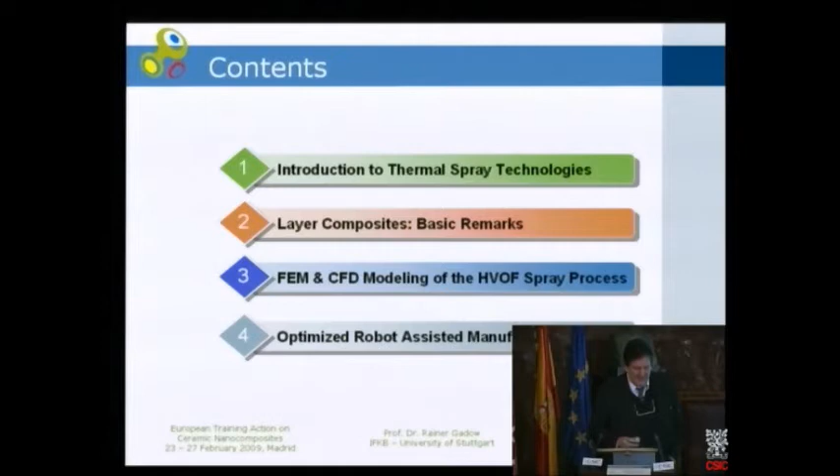So, a few words on thermal spraying. What does it mean? We have a high energetic process where, with a variety of torch equipment, we have a high-speed expanding flame or plasma jet, and we try to load this expanding jet stream with powders, solutions, suspensions, emulsions, whatever may be useful to produce performing coatings on a substrate.

We like the Swiss, so this yellow robot is not from China, it's made in central Switzerland. This is a new generation of robots with very high stiffness and precision in their movement, so they can handle a torch with the same power as a jet engine of a military aircraft, but reduced to a tenth or a thousandth of its volume.

What really occurs in this process is very fast melting of the original particles by intensive heat transfer from an electric arc, a plasma discharge, or an intensive autogenous flame. It can also be a laser employed, or detonation of a gas mixture. The most important feature is how to manage the acceleration, in processes that mostly work in the range of the speed of sound and even superior. I'll show you some details in a minute.

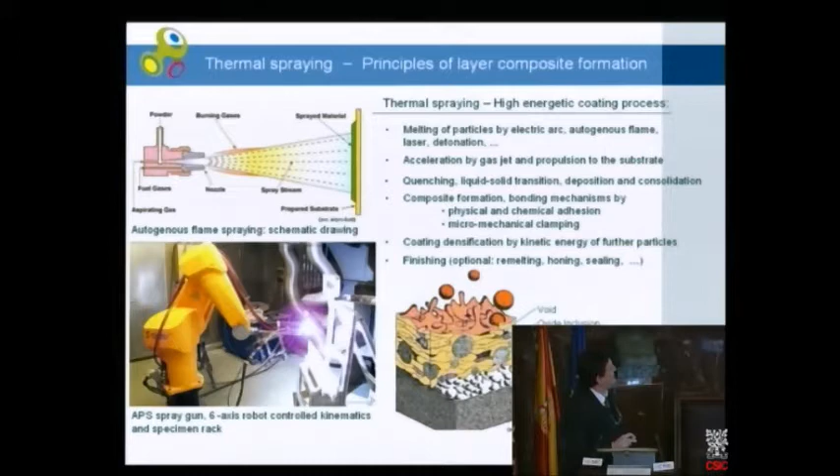An extreme example is shown here. We have a material as a coating with a melting point far beyond 2000 degrees C, and we coat a fruit, an apple, that can hardly stand 60 or 70 degrees C without being converted to a nice dessert, as some cuisine chefs like to do. The reason is that neither the torch nor the apple itself is ever standing still.

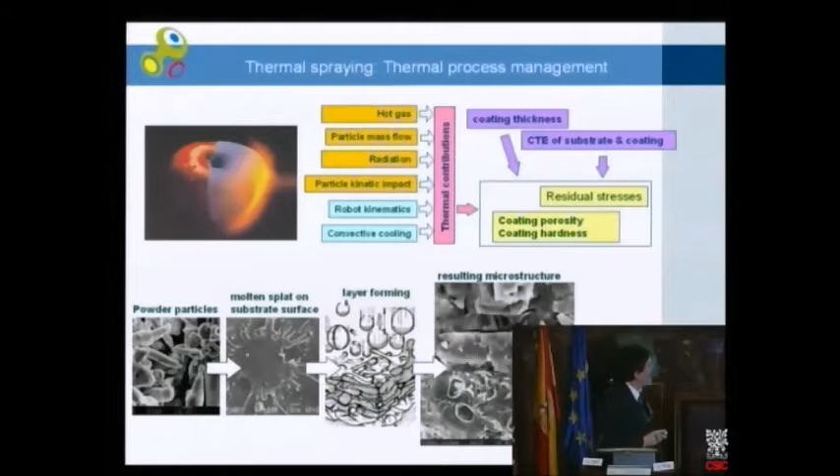That means the kinematic arrangement between this high energetic source and our component, our substrate, is a completely new and additional challenge. We have to manage this hot gas or plasma plume, the mass flow and mass transition from source to substrate, and the radiation. We have to manage the impact, and so that our substrate can withstand these rough conditions, we need sophisticated simultaneous cooling and sophisticated robot kinematics to combine these extremes into an industrially successful process. In the next few minutes, I'll show you the content in more detail.

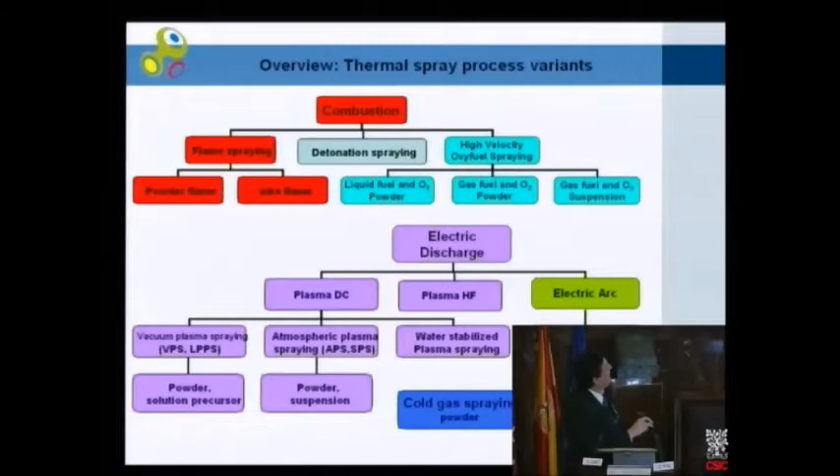We can separate between processes driven by a high chemical potential, meaning intensive combustion processes, and the second family where we have electric discharge processes. Here we have the variety of plasma processes, and in turquoise these techniques we are a little bit in love with: the high velocity oxygen fuel spraying with all its variants, leading to these supersonic fast deposition technologies.

What is the main difference, the main characteristics, between plasma spraying on one side and modern flame spraying techniques on the other? For sure it is the physical principle, but I don't have time to go into detail. The main feature is that with plasma sources we can achieve temperatures so high we can melt every type of material, and melt it very quickly.

But we are limited to a certain extent, referring to the efficiency rate, meaning the deposition rate, and we are limited by the kinetic impact, meaning the particle velocity. If we go into more detail, we have to talk about the velocity distribution, the distribution in space, meaning a multi-dimensional approach.

The nice thing is that these processes are operated under atmospheric conditions. So with a background in physical chemistry, this is not like a PVD or CVD process, a closed system. This is at least a partially open system, and that makes it so attractive for industrial application.

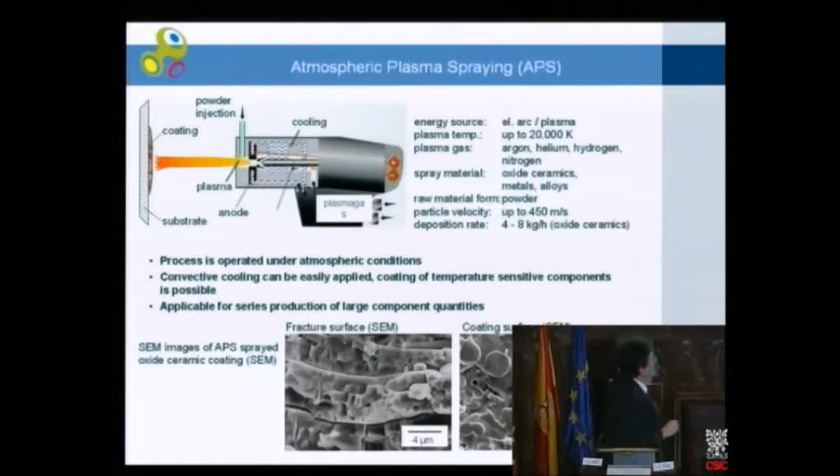In any case, we have this transition of a solid powder to a temporarily liquid, fine droplet, and the consolidation of many droplets into the layer, our coating. In the case of a plasma torch, the typical feature is this multilamellar structure, and you can clearly see this is a distinctly anisotropic material in its electrophysical, its thermophysical properties mainly. That's the look on top, so we can see the splats at the upper surface layer. This is more or less the conventional modern plasma coating deposition of ceramics.

In contrast to that, the supersonic flame spray - with higher resolution, this material looks much more like a hot isostatically pressed or sintered ceramic. There are no more lamellas. One reason is we have a much higher kinetic impact, producing much denser and better adhering coatings, but the drawback is, to a certain extent, the limited process temperature. So we cannot process any type of ceramic - there are some limitations, for example with zirconia and its blends.

But the nice advantage, you can see it here in this picture - there are 1, 2, 4, up to 6, 7 nodes, the Mach nodes, and you see the velocity of the gas jet can exceed 5 or even 6 times the speed of sound. That makes it so challenging to inject our ceramic powder into this high-pressured combustion chamber, use the strong acceleration, and use the impact to make the final coating.

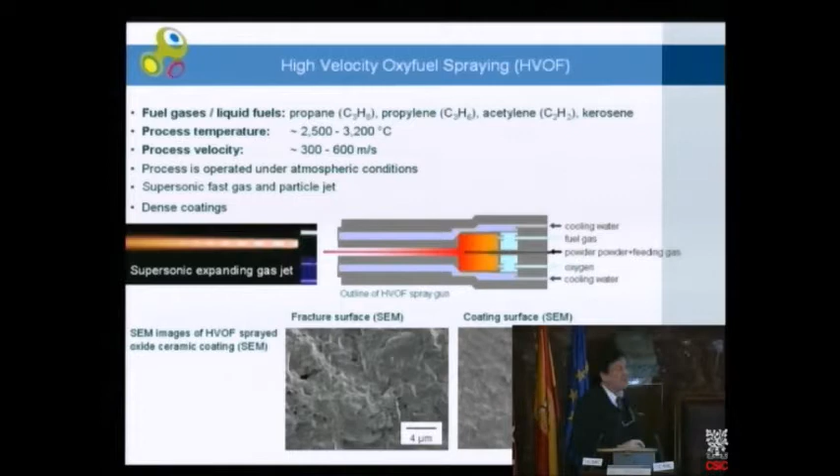But we have this intensive heat and mass transfer and also momentum transfer. Today I will not go into detail on the experimental results so far, but will show you the outcome from the viewpoint of building up a model and using simulation techniques to predict, and not only to predict, but also to optimize the processes.

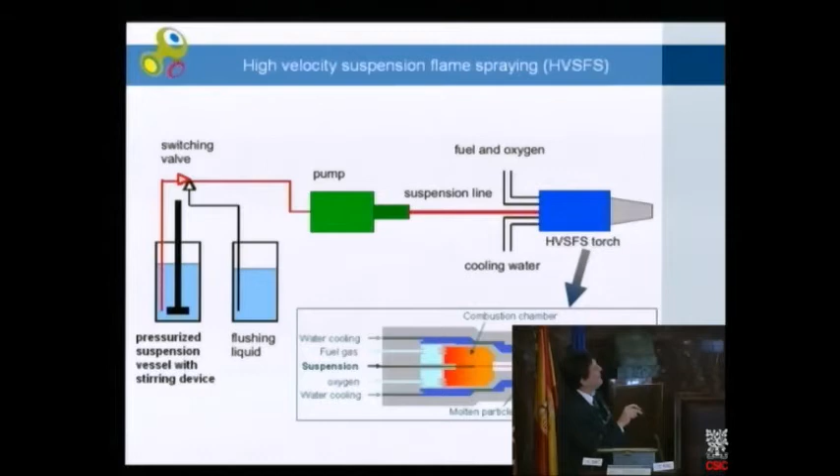Last but not least, in the introduction, a few words on this brand new technology we developed in the last 3 years, where we employ directly the suspensions. That means direct processing of nano-powders in a workplace safe environment, in a suspension, in a closed system, closed loop, with a high pressure pump, and direct introduction of this suspension to our torch. This means a completely new design in the combustion chamber, and also an adaptation of the nozzle geometry for the free jet, as I will show you in a minute. So the traditional way is the introduction of gas-fed micron powders. The new technology is the introduction of liquid-fed nanopowder suspensions.

The application of these types of coatings covers a broad variety, not only in the machine industry. Professor Mäntylä knows very well that the paper and pulp industry needs these protective coatings. We have it in the biotechnologies, and the special feature of our Stuttgart development, for sure in the center of the automotive industries, is ultra lightweight engineering, using lightweight alloy basic components and giving them functional surfaces consisting of micro and nano ceramics. But the same is true for a new generation of fuel cells, where we come much closer to complex electrophysical properties.

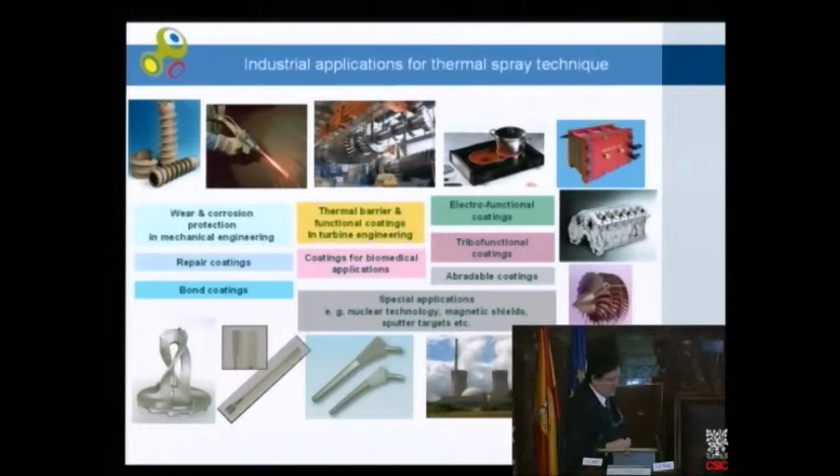And with the approach of modeling and simulation, this may describe to you the challenge, the general challenge in this field of process simulation. This is not a one-step process. It is a process chain.

And just in case of the lightweight engines, one example is shown at a poster in front of the audience here. The first step is what we call the substrate pre-processing. That means how to prepare the surface, not only to have the best adherence of the coatings, but also to have the best fit of stress distributions. Then we have as an option the selective masking, because in many cases we don't want to coat the complete component, just a part of the functional surface where the value adding makes sense.

And then the core business, the coating technology itself. This is a rotating device, but the coating is not enough. True to type, high precision coating is one thing, and the post-processing, that means the precision machining with all its technical and economic challenges, is a further important step.

And here you can see the cut through such a 4-cylinder engine where we have just an 80 to 100 micron functional coating instead of the original cylinder liner.

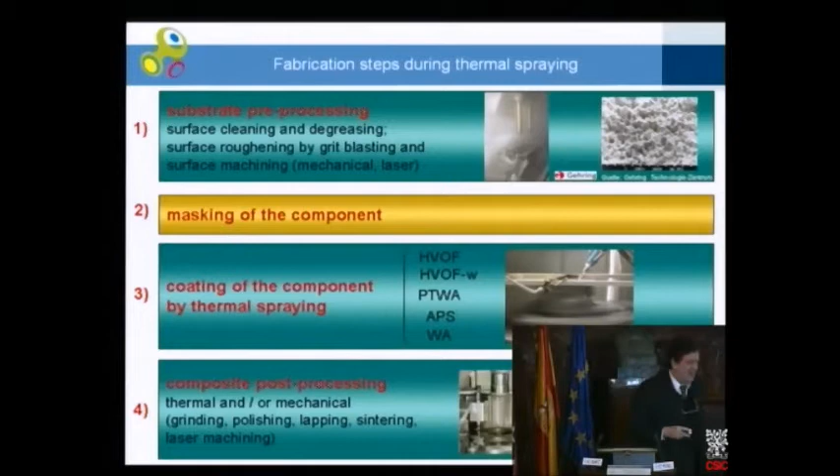So in any case, I try to educate our engineers to understand the complete full process chain to find the most appropriate solution also for the individual steps. So far my introduction.

Coatings understood as layer composites. What does it mean? It first means a completely different theoretical approach. Just to combine one material with the other, that is the traditional way, but this cannot be the standard we follow in these years. That means the creation of protective and functional coatings and combining them with the properties of the structural material as a carrier - this is well known and well understood. But we finally need a reliable structure, and we also need a reliable manufacturing process. And this gives you the first hint that just combining the two materials by far is not enough.

By far is not enough. And one basic reason is that there is a distinct interaction between the two materials, between the coating and the substrate - not only under operational conditions, not only under testing conditions at room temperature in a lab, no, also in the conditions of manufacturing, that means in the processing conditions. So therefore we need a deep understanding of adhesion, of chemical compatibility, and the complete set of physical compatibilities. And if you see that people combine lightweight alloys with ceramics, and you see this large difference in thermophysical properties, for sure we have to handle the problem of high thermal stresses and residual stresses as they result from the process and its history.

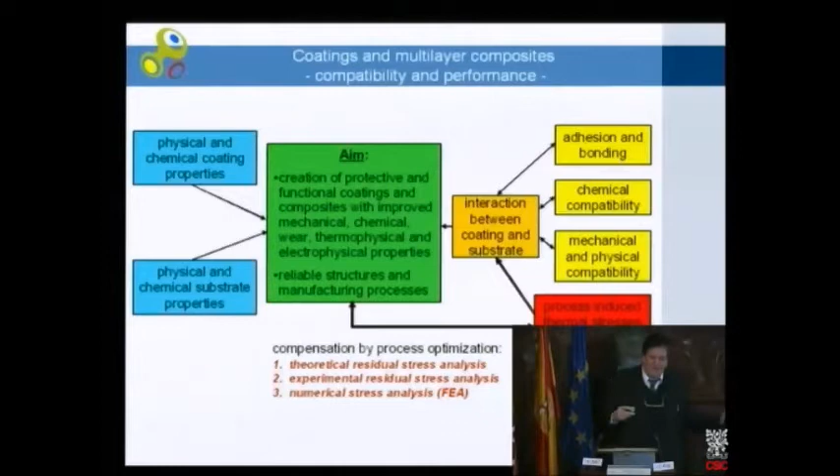So some people see this as a problem or even as a disaster, and they never come to an end. We take it the Japanese way. We say this is the challenge, and if we can manage it, this is the way to create a new set of composite, layer composite products. And therefore we need the full understanding in the theory of residual stress involvement, the analytical tools, the experimental setups, and last but not least, the numerical stress analysis to understand what is going on in the product. And you have seen and listened to my forespeakers that the finite element method is an important approach, but it is by far not enough.

The mismatch in the thermophysical properties is well known, but we also have to face a lot of process-induced influences. For example, the well-established grit blasting, laser structuring and machining, or water jet machining in the pre-processing. This mainly causes compressive stresses.

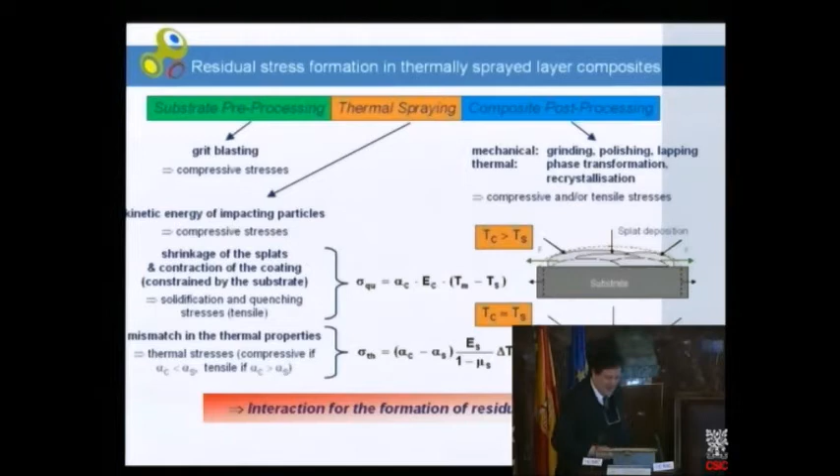The thermal spray process itself will influence a variety of stresses. There are tensile ones, there are compressive ones with respect to time. I will not go into too much detail, but we should not forget that any type of post-processing, especially mechanical post-processing, as needed for precision grinding, polishing, and machining, will also be distinctly affected by

the contributions of the earlier process steps to the total stress situation in our layer composites. I will show you that with a simple example. It is the same geometry of a material that is coated, and it is the same type of coating. We will just vary the substrate: magnesium, aluminum, titanium, and steel.

You can read the types in detail, and you can see that there is a distinct influence in the compressive stresses. Zero is the outer geometric surface, and we have developed a method to determine the stress distribution not laterally, but in the depth profile.

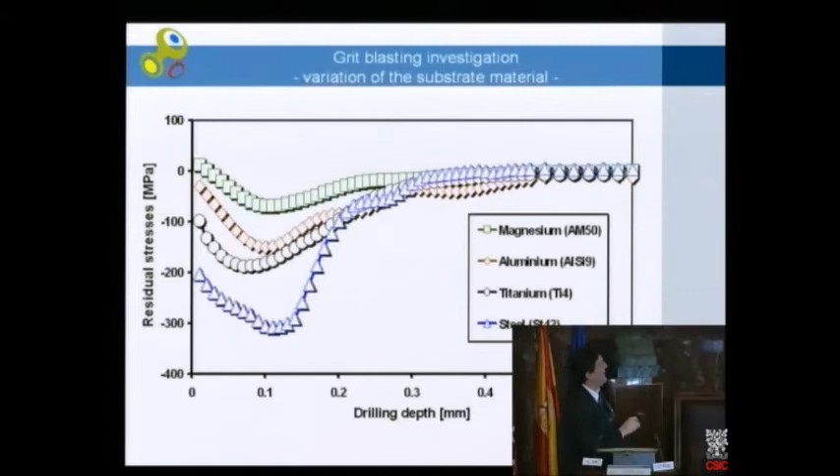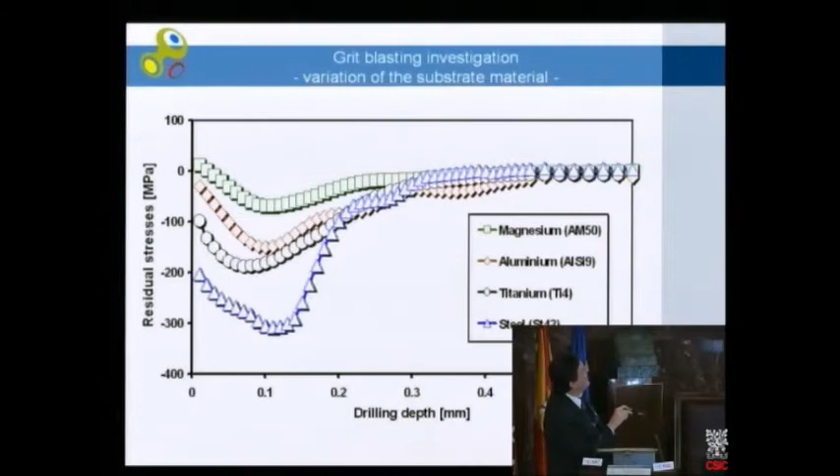And what we can learn in a second is that the elastic modulus, the Young's modulus of the substrate material, has an important influence on this type of stress as it occurs near the surface or in the interface between the substrate and the coating.

Another example: we have a constant type of substrate, a constant type of coating, but now we vary the heat transfer. The heat transfer is influenced by the type of energy carrier - propane, always plus oxygen as the combustion mixture, or here a liquid energy carrier, kerosene with oxygen, and for comparison, two types of plasma coatings, one of them

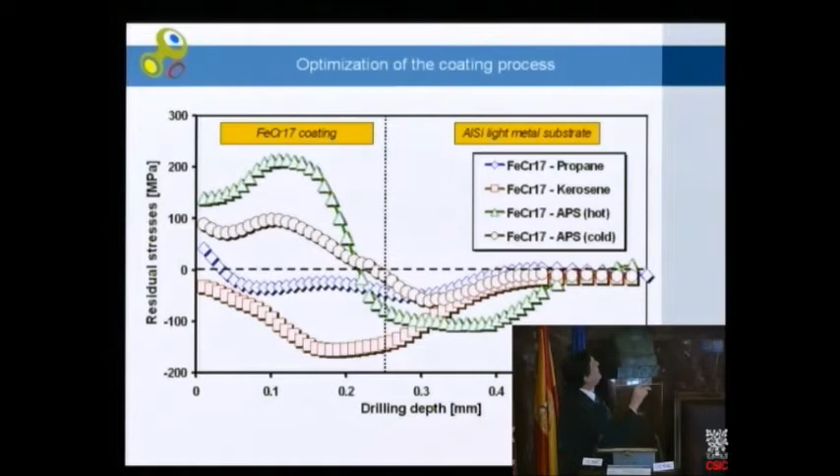with additional simultaneous cooling. And wow, what we can see here is such a strong variation that we shift from compressive to tensile stresses - an amount that is not so much for a modern bulk ceramic, for a solid structural material, but it is sometimes critical for the tensile strength of such a coating material.

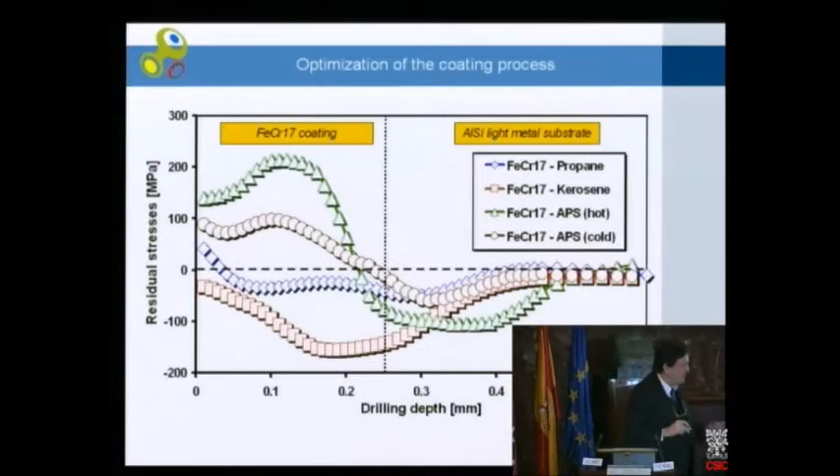And lastly, if you have learned this lesson, you may guess that it is indispensable to manage, to understand, to control the occurrence of these thermally and process-induced stresses.

The last example to show the importance is the variation of the cooling. Three times the same material, the same substrate, the same geometry, the same design, just varying: without any cooling, the red line; with traditional compressed air cooling; and quite intensive cooling with liquid carbon dioxide plus compressed air cooling. And you see again, we can vary the stress distribution by more than an order of magnitude.

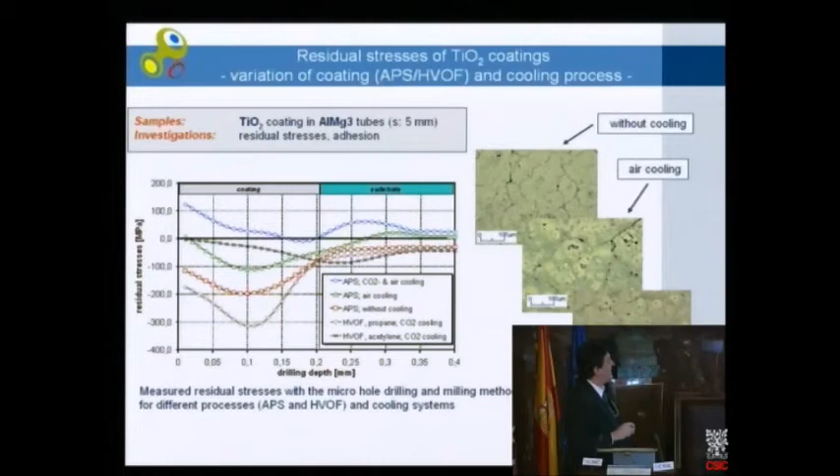So we can summarize: the substrate plays an important role, the heat transfer plays an important role, the mismatch in thermophysical properties plays an important role, and there will be further important factors that influence these stress distributions, and they are essential for the reliability and functionality of our final product.

An extreme example is shown here. This is a so-called ozonizer tube - a precision glass tube with a metal electrode and a ceramic dielectric on top. And this is the same product, a little bit different magnification.

That's how it looks - a borosilicate glass as a carrier, and this double layer in a situation with well-balanced residual stress distributions. And this can happen: if you leave for lunch in the morning, your piece looks beautiful, and you come back and you think, oh, there was some foe who destroyed my sample. It was just the critical amount of residual stresses that brought the piece to something like an explosion.

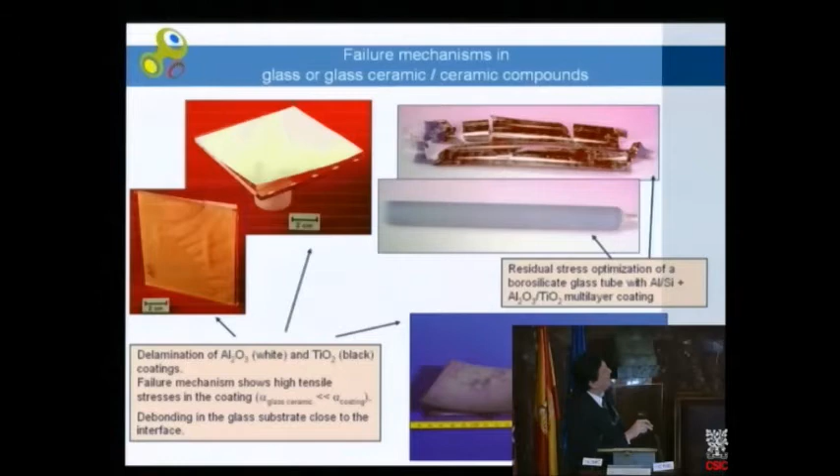Not so harsh, but the same effect will occur if we have an undesired deformation of the sample. That means every detail related to dimensional tolerances is also connected with this subject of residual stress distributions.

As I mentioned before, we have to overcome this problem, and therefore it is essential that we do not only understand the final result, but also measure the temporarily occurring stresses during the various manufacturing steps and the residual stresses. Both groups have to be investigated. And therefore, we need the theoretical background, and again, we need the experimental setup, and we have to match it with the calculations by numerical stress analysis.

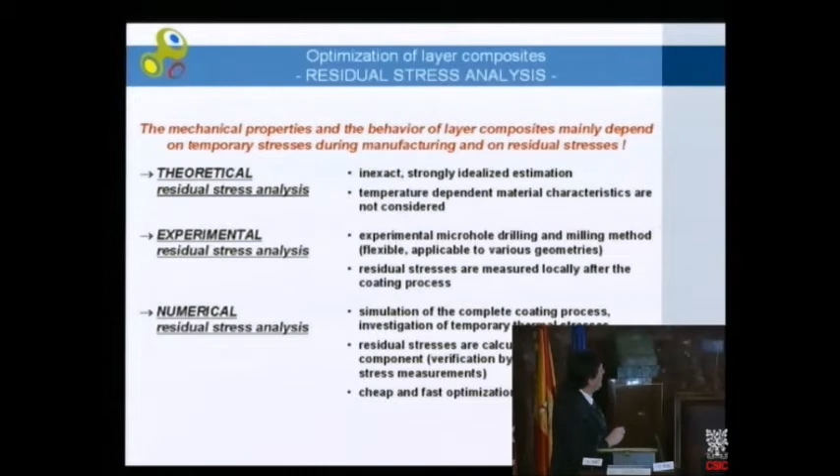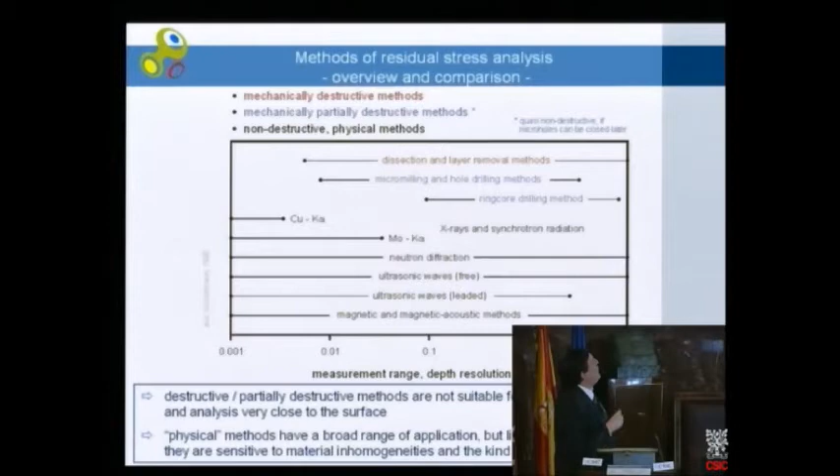Which can be the tools? Principally, we have the mechanically destructive methods. They have sometimes been adapted from critical components in the nuclear plants. We have the mechanically partially or only locally destructive methods, and there are the well-known non-destructive, we call them the pure physical methods. They have all their advantages and disadvantages, but it is important to know what is their lateral and depth resolution ability.

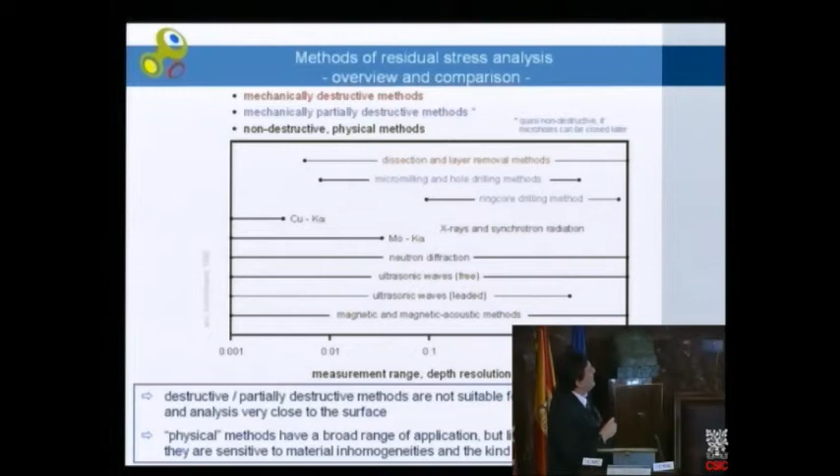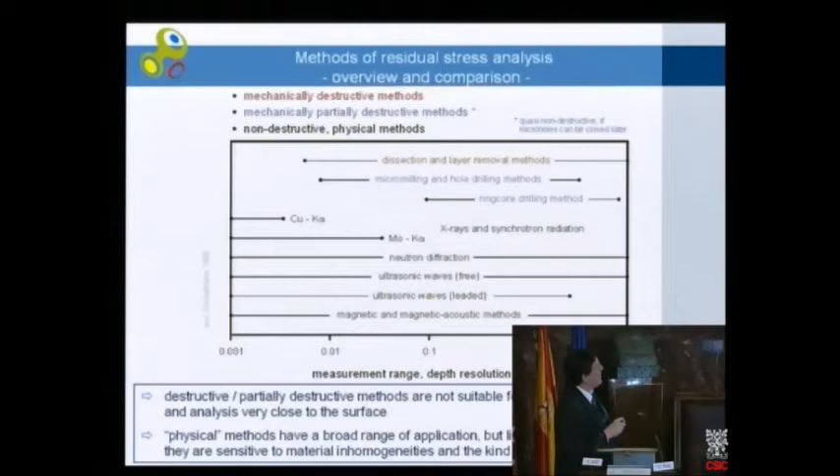So we can see that in the case of this type of coatings, varying from 10 micron to maybe 500 micron, this quasi-non-destructive technique, what we call the micro-hole milling and drilling method, is a quite appropriate one, and we try to combine it with X-ray analysis and also with magnetoacoustic analytic tools.

So, an intermediate summary lets us show that the understanding of the material properties is essential, for sure. And it is also for sure that we have to manage all the parameters related to the thermal spray process. We have forgotten one field, and this is what happens with our component under operational conditions.

Thermal stresses, residual stresses was one thing. But imagine what happens in a Formula One racing car's engine. It will start at the beginning at room temperature, not as cold as we have it in Northern Europe just now, but then it will run up to a temperature close to the turbocharger, 600, 700 degrees C surface temperatures. That means we have also to think about the operational load stresses, the mechanical ones, and the thermal stresses that occur in the final mechanical system.

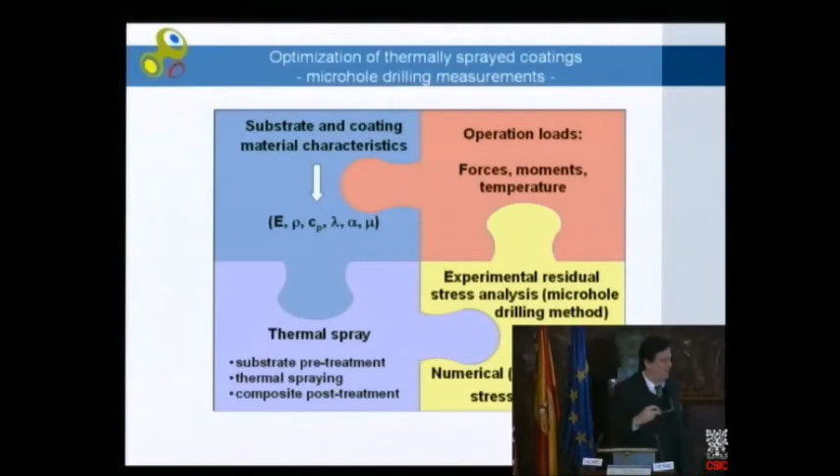And last not least, the modeling and simulation is now the essential tool to understand, to calculate, to estimate the interaction between the stresses that are occurring from our process and the interaction with the operational load stresses.

So the analytical tool is shown here. That is the so-called microhole drilling. We measure the surface stresses, and these surface stresses are transferred to the strains in the depths at the bottom of the hole we create by this micro machining operation, and we calculate the stress depth profile by the stepwise drilling and milling operation. So typically 5 micron stepwise from the surface to the bottom, and this allows us, depending a little bit on the material, to analyze the stress distributions up to a depth of 1 millimeter.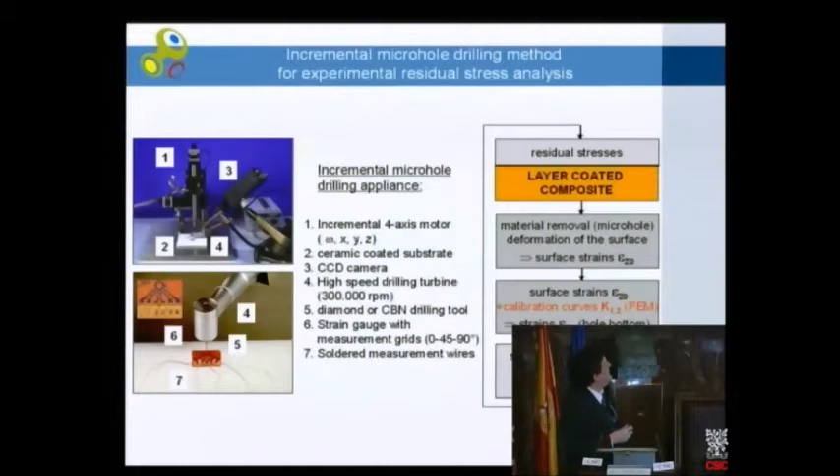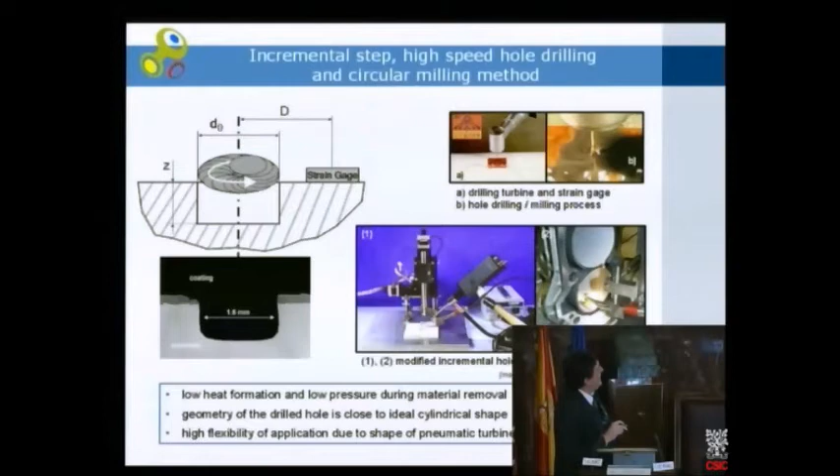So this shows such a typical hole, and you see this is also a mobile equipment that is used not only for the measuring of stresses in passenger car engines and sports cars, but also for jet engine components.

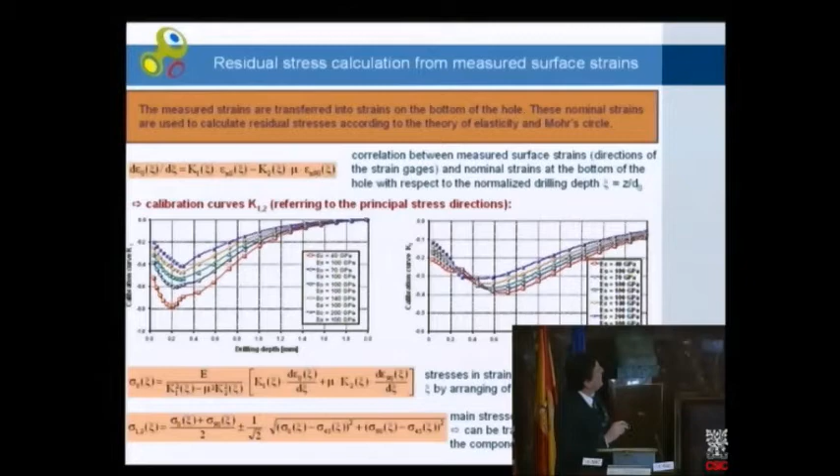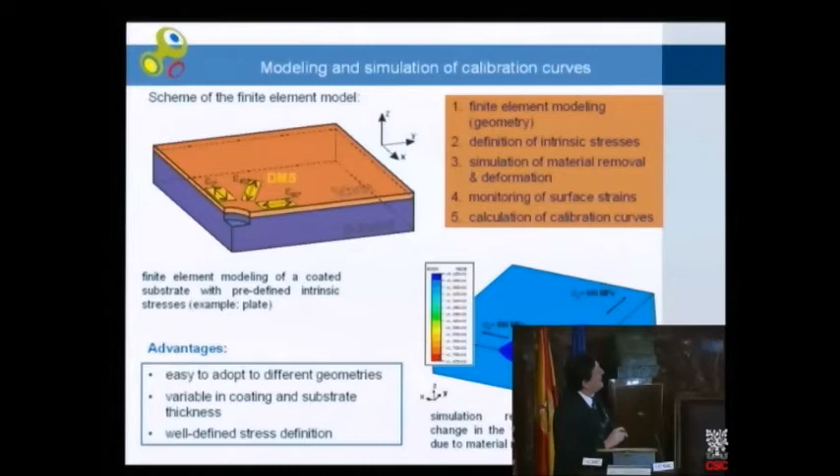So the calibration curves, that was a lot of hard work for Martin Wenzelberger and his team to calibrate the various sensors employed in this technique, so that step by step, by a more and more finer calibration, the more reliable are the results. So here we have for the first time the finite element technique employed, where we take the quarter plate, where we bring down the bore, and now we can decide what is the resolution we prefer to understand it, and it is not just the meter scale or the centimeter scale. It is no problem to go down also to the micrometer scale.

Finite element method, essential for mechanical engineers, and quite interesting to understand these layer composite properties, that is our product. And again, the most exciting example for our young engineers are these high-end engines. And if you look at such a 12-cylinder engine of the present technology, the total weight is not superior to a 4-cylinder engine with only 10% of the performance of 30 years ago.

And the reason is, it is no more heavy gray cast iron with centimeters of wall thickness. It is an ultra lightweight special aluminum alloy, and just on top, we have a ceramic coating, in some cases with an additional bond coat, and this is the core of the process assembly, where we have again these high stiffness, high precision robots, and you see the torch with this jet, and now we have to think about the best fit of the kinematic arrangement of this supersonic flame spray jet versus our substrate.

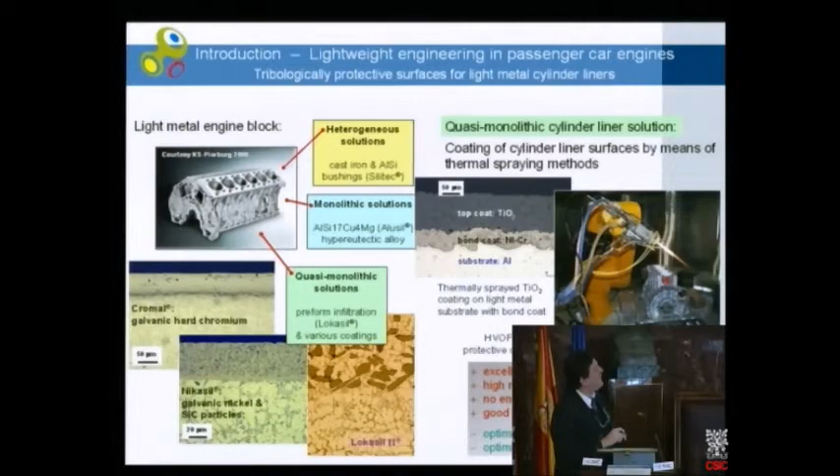So I will not talk about the nice material properties. This is published in quite more than a dozen papers. Today our focus is the challenge to optimize the microstructure of this material and to optimize the stresses and the stress distributions. If these two challenges can be overcome, we can really exploit the beneficial material properties.

The first step is to understand the compatibility between our ceramic coating and the light metal substrate. There's a big difference in thermal expansion between the two components, so it's not easy to use a plate in this case. We start with a cylinder, and I'll show more complex geometries in a minute.

What we have to do first is simulate the heat transfer, the heat input into the coating and the substrate material, and understand the various phenomena of heat conductivity.

This is the typical setup of the finite element model. We started with pure elastic properties as the simplest approximation, with further approaches going into more detail with elastic-plastic behavior and other variations. It's a system of solid brick elements, sequentially coupled temperature and stress fields—this is called coupled temperature stress field analysis.

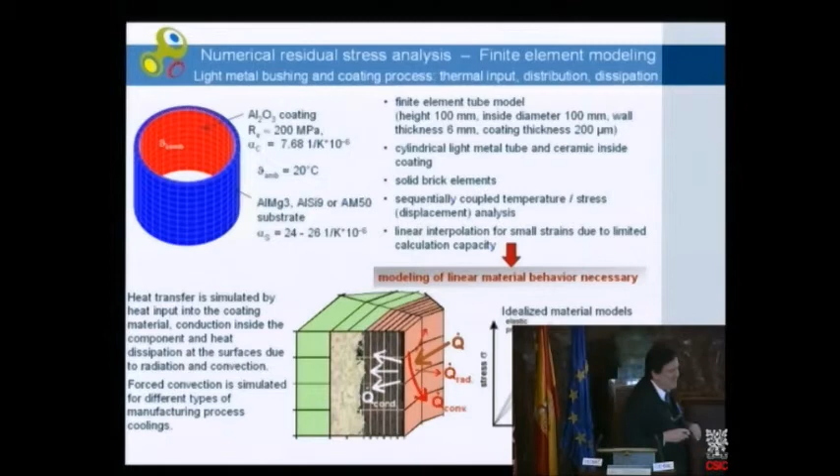To limit the computational effort, there is linear interpolation for small strains due to limited capacities. Some of this work can really be done with a modern personal computer—you don't need more in this case. In other cases, we need access to a high-performance computer center.

Simultaneous cooling is an important process component we must understand, so that we can find a good fit for the total heat transfer.

Let me show you the three main systems. Here we have two injectors rectangular to the plasma torch. The tube itself, the cylinder of this engine, is in rotation. Here's a different arrangement with an additional fan with about a dozen nozzles, so we have compressed air plus liquid carbon dioxide cooling.

And here is one of the most sophisticated simultaneous cooling systems, with two cold spots, not just the hot spot. To give beginners an idea: with a plasma jet exceeding 3,000–4,000 K on the surface, we can manage it so the substrate doesn't exceed 60 or 70 degrees C. That means the effects of simultaneous cooling are crucial and one of the most important tools in our hands to overcome the misfit in the original material properties.

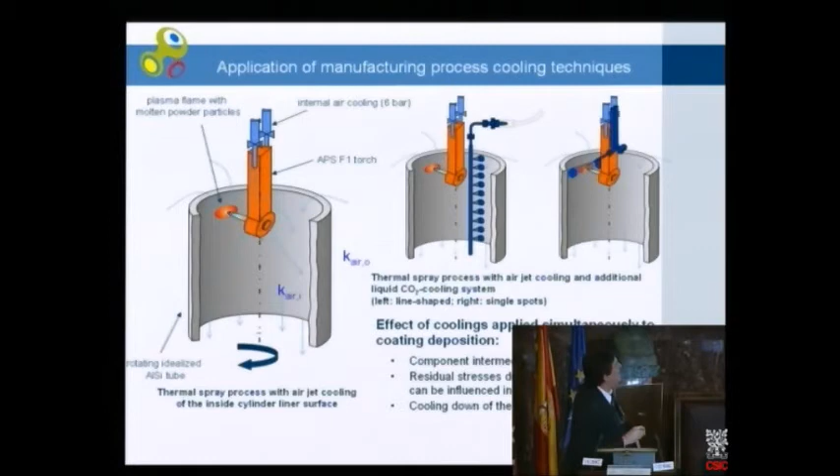Now, the results of this finite element analysis and simulation for the thermal spray process of ceramics on light metals. We may start on the left-hand side with just the coating deposition—here we show the mass transfer.

Let me see if the mouse works... oh, great. The piece is under rotation—here it's shown with a fixed piece, but you can easily imagine it rotating. Step by step we change the finite element mesh, changing the first set of meshes on the surface from the substrate material properties to those of the coating.

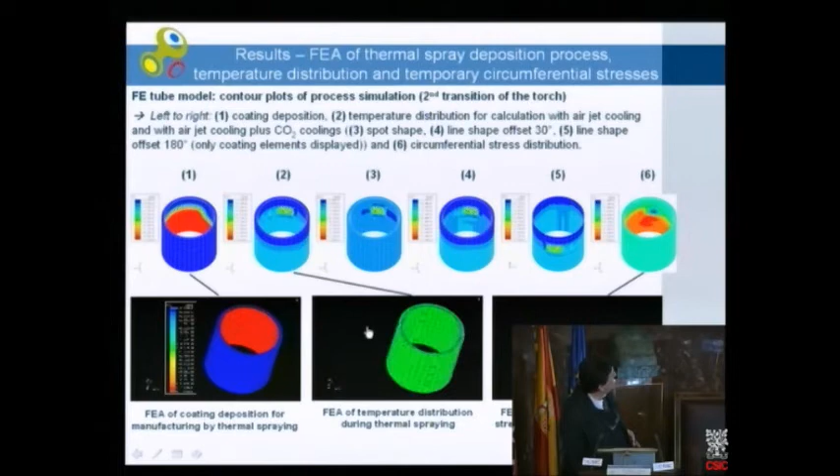So now it's finished. In the second view we show the temperature distribution. You see the hot spot occurring on the surface in a spiral geometry, but the material itself is not overheated.

And on the right-hand side, after the mass transfer and temperature evolution, we now have the stress evolution. You see there's a quick relaxation as the hot spot travels over the internal surface of the cylinder.

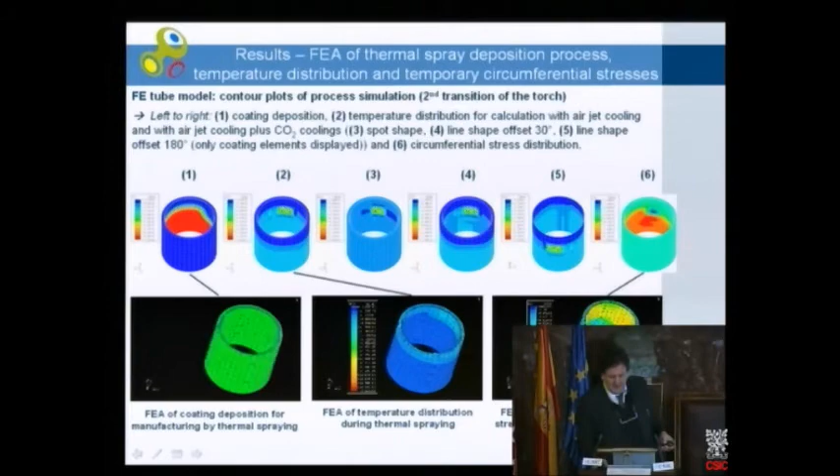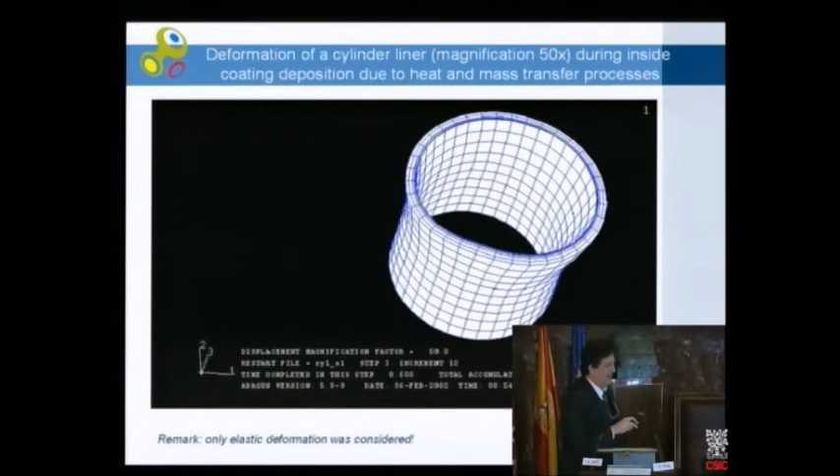So these were the first steps in understanding this process. Another important factor is understanding the deformation—is it purely elastic, or is there a small amount of plastic deformation, meaning we cannot obtain the original dimensional tolerances? This is crucial, especially in the example when BMW brought up a new engine.